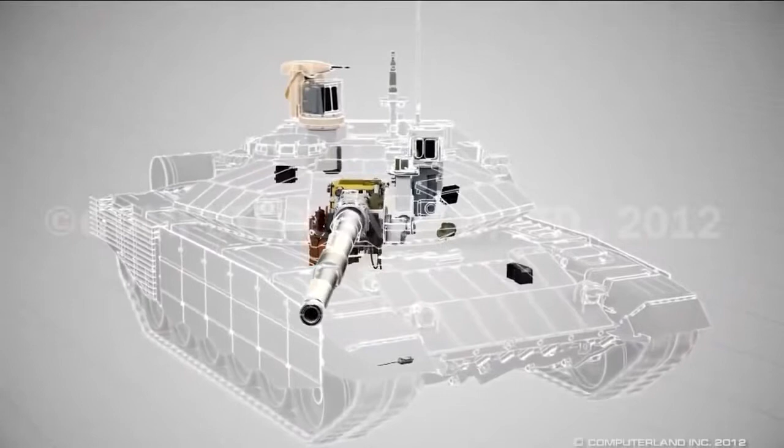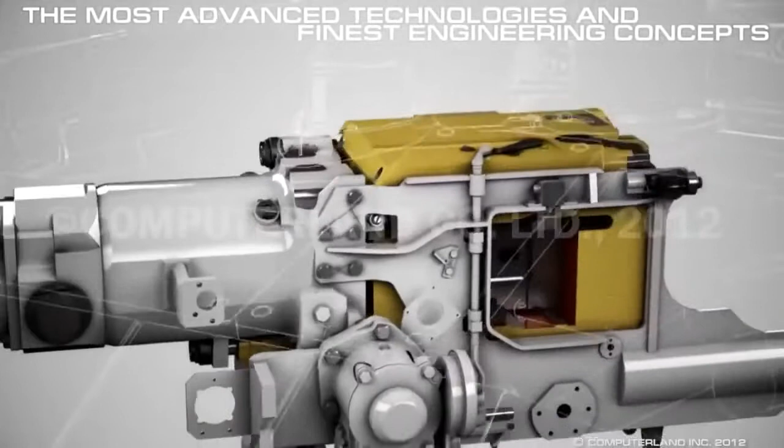2A46M5 gun. The most advanced technologies and finest engineering concepts, well grounded in years of experience in tank and artillery design and manufacturing, are applied in the making of the enhanced 125mm gun. The improvements have provided for higher precision and fire accuracy due to the new constructive solutions and technologies introduced at the production stage.

The gun has a high rate of effective fire range with conventional ammunition. For example, with the APDS projectile, the range is up to 2700 meters, which is the best result in the world. The tank is armed with the improved 2A46M5 gun.

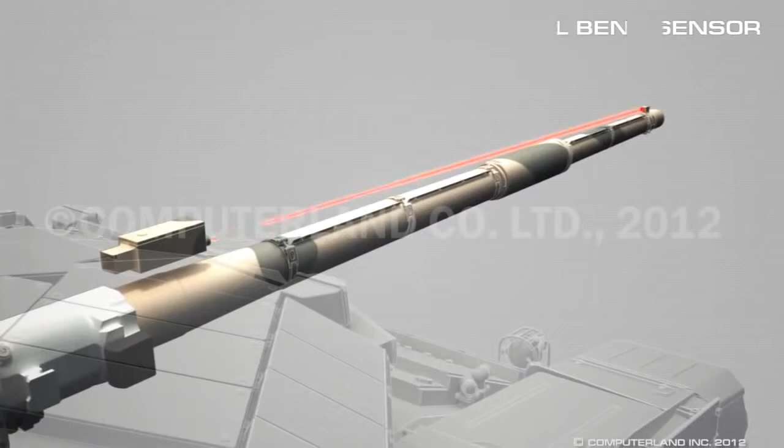In addition to the engineering solutions improving the gun itself, the 2A46M5 is equipped with a barrel bend sensor to increase fire accuracy. This device registers the bending of the barrel, resulting from environmental conditions and interior heat inside the barrel upon firing, and enters the correction data into the fire control system.

The constantly high rate of fire is up to 8 rounds per minute, which is ensured by the automatic loader. The rate of fire is sustained on the move under any conditions. In this respect, the tank is unsurpassed and has no rivals in the world. The automatic loader holds 22 out of the 40 rounds the tank carries.

The tank's ammunition includes 4 types of gun rounds, which guarantee destruction of all enemy targets and successful execution of a wide range of fire missions on the battlefield. HEAT shells are to destroy armored vehicles, brick and reinforced concrete structures, as well as manpower sheltered in field fortifications. APDS projectiles are designed to defeat modern tanks with combined armor protection.

The guided missile with a shaped charge warhead hits armored and heavily protected small-sized targets with high accuracy. In addition, it can be used to destroy low-flying helicopters. High-explosive fragmentation shells are essential in combat against manpower, artillery and field engineering facilities.

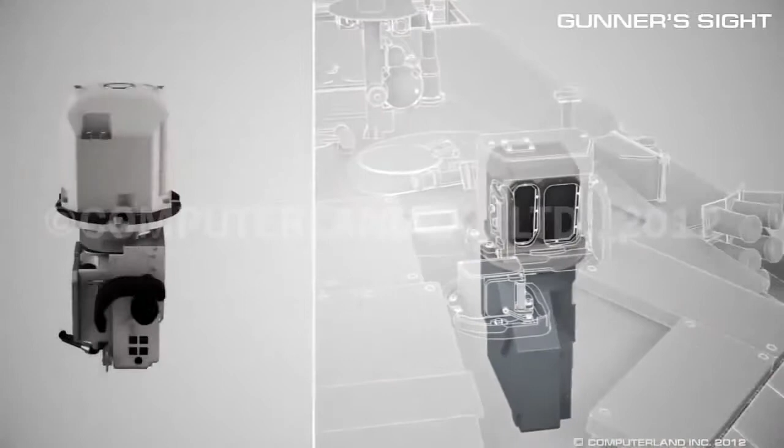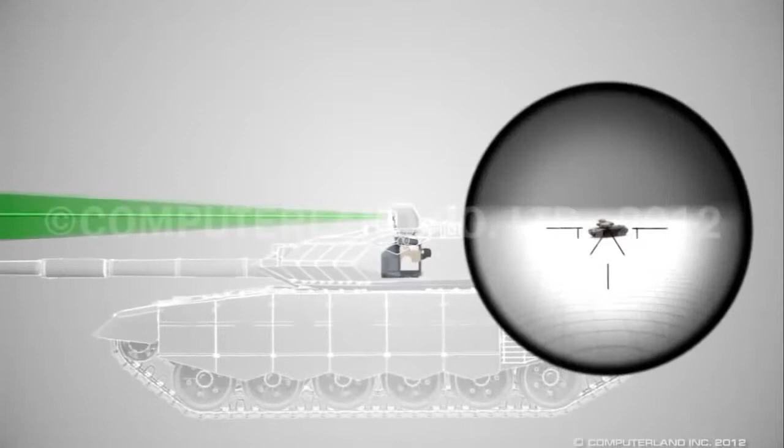The gunner's sight with 2-axis independent stabilization of field of view is multi-channel. It has a sighting and a thermal channel, a built-in laser rangefinder and a missile control laser channel. The sight enables the gunner to detect and accurately hit targets under any conditions. That is due to the improved optics and high-precision stabilization of the sight's field of view on both vertical and horizontal axes at 0.1 milliradians.

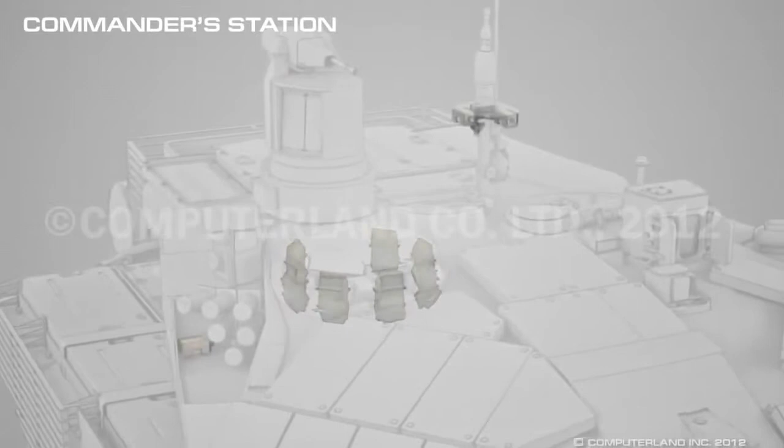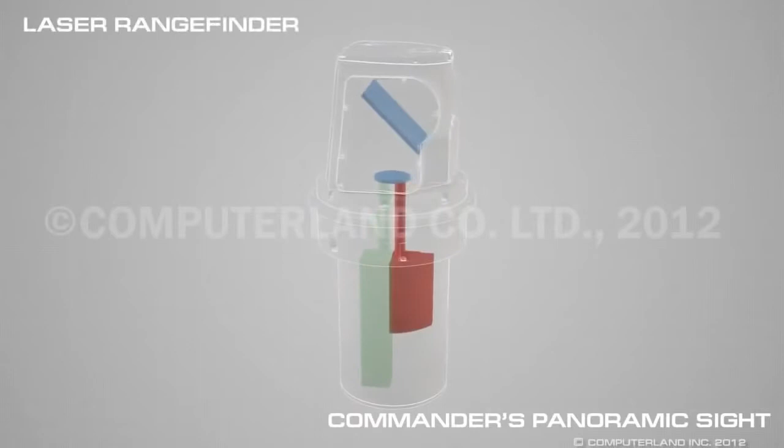Commander's station has been largely improved in terms of target detection, firing and combat management. For this purpose, a panoramic sight, 8 prismatic vision devices and the all-round video observation system are newly installed on the T-90S modernized tank. Commander's panoramic sight with the 2-axis independent stabilization of field of view has a thermal and a television channel and a built-in laser rangefinder. It provides 360-degree target detection and tracking.

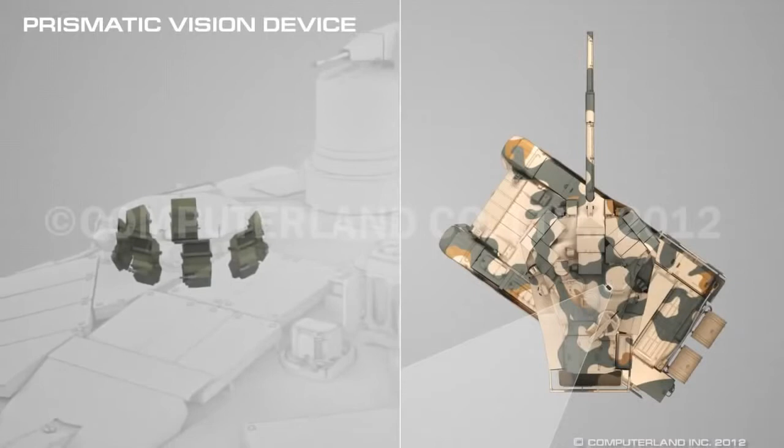External video observation system ensures the commander's all-round surveillance over the adjacent area. Its 4 television cameras can work in low light conditions. Commander's nearest visibility is simultaneously provided by the 8 prismatic vision devices located around the perimeter of the hatch. Each device has an indicator showing presence of the panorama field of view in the device's observation sector.

There is a mode of aligning the sighting line of the panoramic sight with either a chosen prismatic vision device around the commander's hatch or the field of view axis of one of the TV cameras. One can also automatically align the panoramic sighting line with the direction on the electronic map on the commander's multifunctional control panel. All those functions significantly increase the commander's visual and searching capabilities.

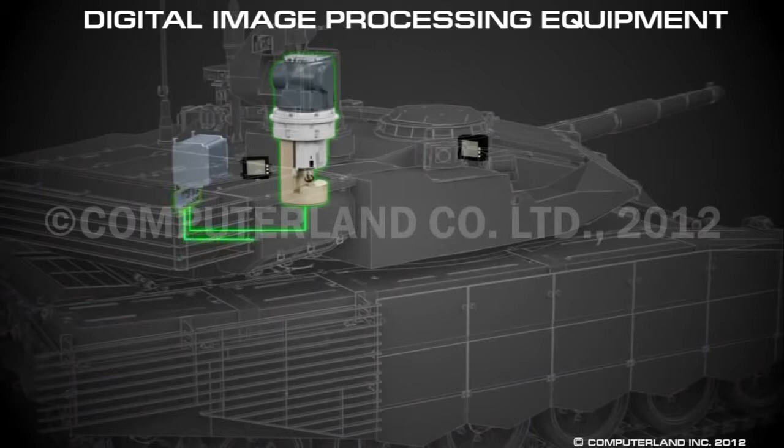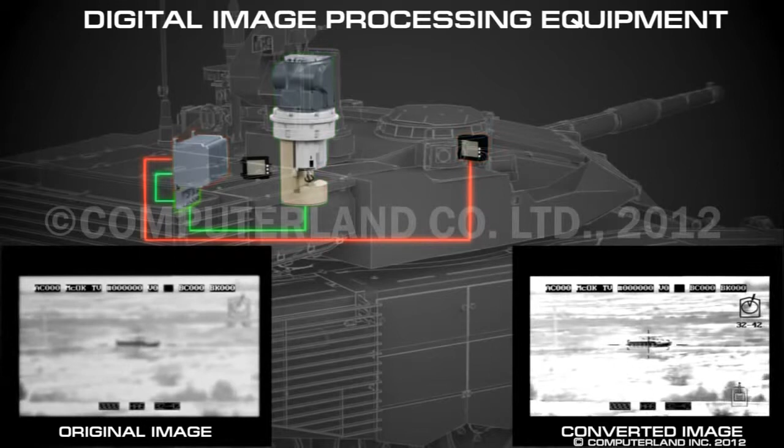Image quality of the commander's video viewing device is enhanced due to the system of digital image processing of the video signals from the thermal and television observation channels. Therefore, a T-90S commander can recognize targets at distances of up to 5,000 meters. In addition, the equipment performs the function of automatic target tracking, and targets may also be tracked independently by the commander and the gunner at the same time.

The T-90S modernized tank is equipped with a TV parallel sight shared by the gunner and the commander, who can thus conduct observation and firing when their respective sights are out of order.

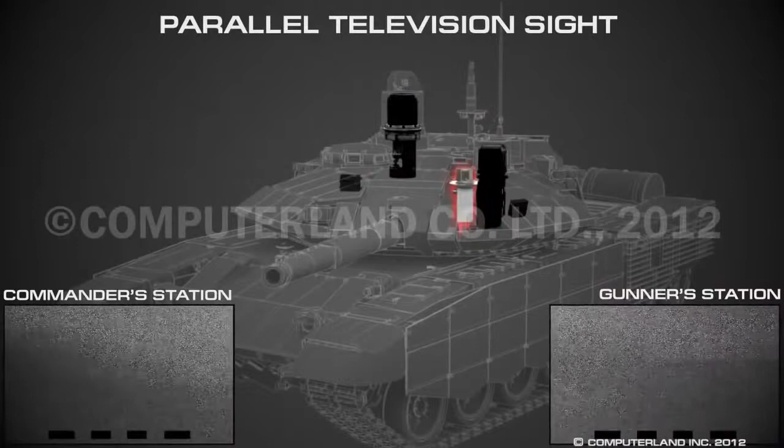The ballistic computer is there to provide automatic record of all data affecting the firing conditions right before the shooting. This eliminates errors in the input data and thus considerably increases the fire accuracy. Moreover, due to the flexibly reprogrammable circuit for calculation algorithms, one can enter the ballistic parameters for new types of ammunition.

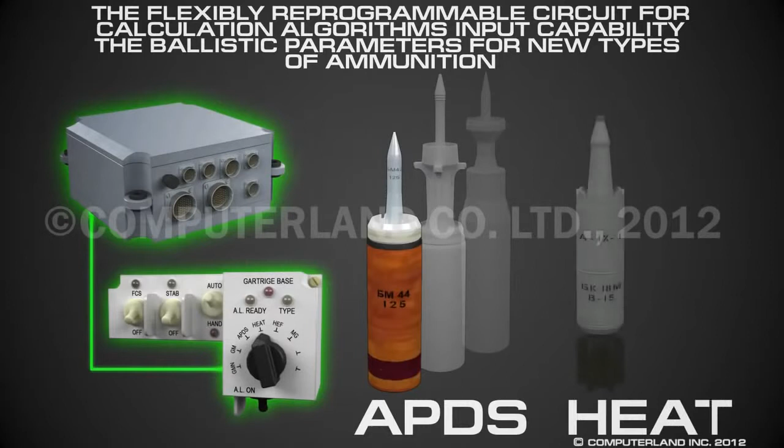A new weapon stabilizer is installed on the T-90S modernized tank. It is based on digital technologies. This provides high stabilization precision and increases the speed of horizontal swapping of weapons.

The maximum efficiency of the tank weapons in use is determined by perfect adjustment of the commanders' and gunners' searching options and by the opening of their respective independent channels of target detection, tracking and destruction. Those options realize the highly effective gunner-hunter mode of the fire control system, wherein the commander conducts observation and assessment of the tactical situation regardless of time of day, detects and recognizes targets, whereupon he, so to speak, passes the targets over to the gunner for extermination and goes on with the target search.

Implementation of new engineering solutions in the armament and fire control system of the tank brings about the following improvements. The target detection period is reduced. The preparation time for firing the first round is cut down to 10 seconds, which is the best rate in the world. The range of target detection is increased to up to 5,000 meters in daylight and at least 4,000 meters at night. The effective ammunition firing range has risen. The probability for the guided missile to hit the target is rated closely to 100%.

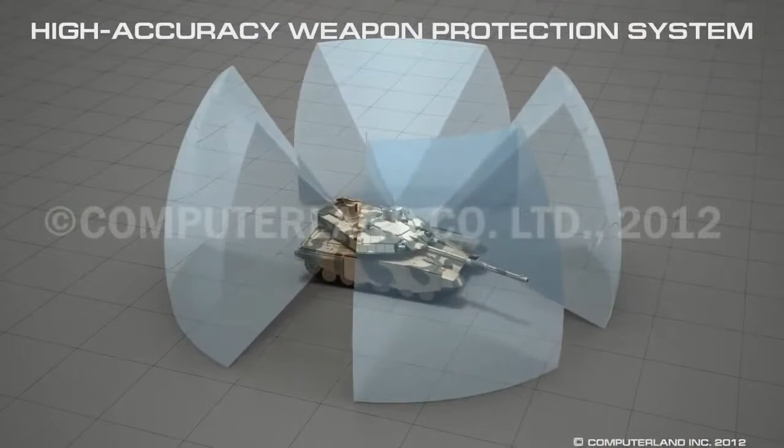The T-90S modernized tank design retains the traditional Russian ideology of complex protection. In spite of the slight increase in the tank's weight, the vehicle has low silhouette and small dimensions. In combination with camouflage painting corresponding to the combat terrain and the heat shields around the power pack compartment, this makes the tank poorly noticeable on battlefield in both infrared and optical range and reduces the chances for its being hit. Once the tank is detected, its automatic screening system prevents the vehicle from being hit by anti-tank missiles.

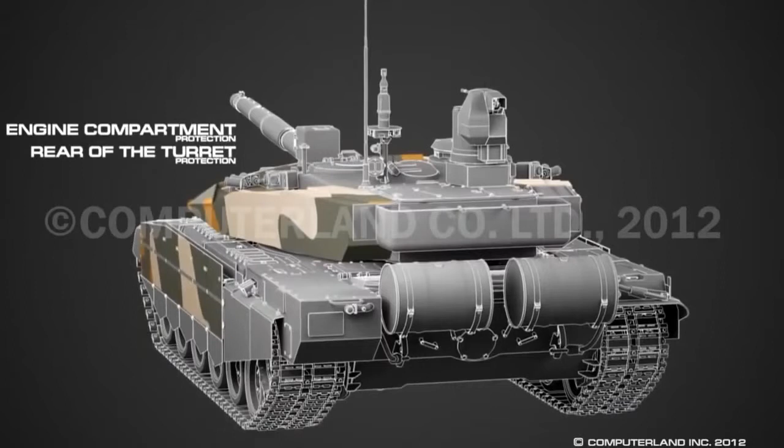Almost half a century of experience in creating dynamic protection for military vehicles and our world leadership in the design and implementation of such technologies have made it possible for us to develop the new integrated protection system for the T-90S modernized tank, which is resistant to all anti-tank ammunition types and which is based upon the new generation modular principle. Additional security is provided by installation of louver panels to protect the power pack compartment and turret rear from anti-tank grenades.

With the presently achieved increase in operation safety, when bullets or fragments penetrate the dynamic protection elements, they do not detonate. Dynamic protection guarantees effective resistance to tandem warheads, secures the tank from the EFP ammunition types, and reduces the impact of shaped charges and armor-piercing projectiles to 80% and 50% respectively. An important advantage of the modular structure of the dynamic protection system is that it considerably simplifies repair and replacement of parts. The protection system is easily operated and maintainable even in combat conditions.

Stowage of the tank's ammunition allowance has been optimized. To reduce chances of explosion, the ammunition in the crew compartment within the possible reach of the anti-tank means is detached into a separate proof section. Security is maintained by the conic shape of the turret, dynamic protection system and the ballistic container. Hence the high survivability of the crew upon detonation in the isolated stowage section. The ammunition placed in the automatic loader and in the additional stowage section for non-automated reload is locally protected by extra shields.

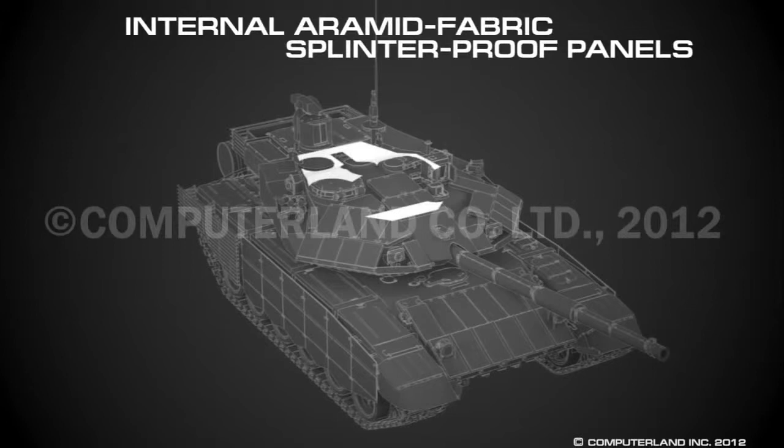Complex protection also includes interior anti-fragmentation panels made of aramid fabric to secure the crew and equipment from the secondary flux of tank fragments. For the outside protection of the sight windows, armored covers are installed, which are remote controlled from the crew compartment. To sum it up, a comprehensive set of safety-inducing measures has ensured the two vital features of the tank's protection systems, namely the vehicle's unsurpassed durability on battlefield and the high survivability of the crew under intensive anti-tank activities of the enemy.

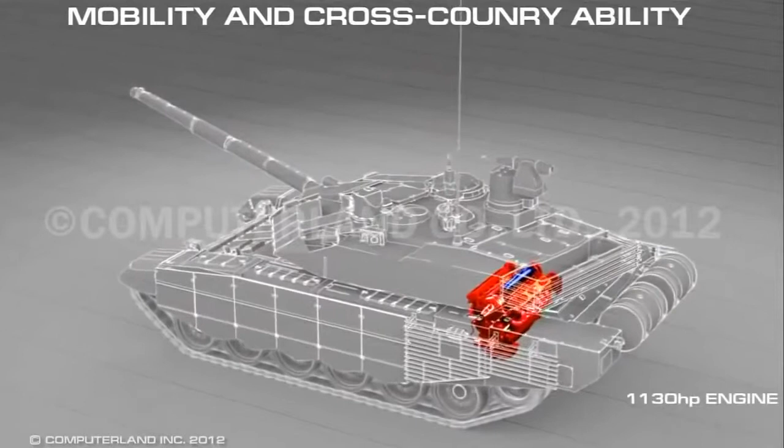The T-90S modernized tank demonstrates high mobility and control, even under extreme heat and dust conditions. This is accomplished by the installation of the high-efficiency 1130 horsepower engine and the steering control system with automatic gear shifter and steering wheel control linkage. As a result, the tank is very fast and maneuverable. Its excellent off-road capabilities are due to its low weight, which allows the modernized T-90S to confidently take any routes on and off roads and bridges in various weather conditions. Furthermore, its fine chassis accounts for the wonderful smoothness on the move.

The tank is equipped with a broadband 2-channel USW radio set, combined navigation system and the equipment to integrate the tank into the division battle management system. The interaction control system provides the following. It receives signals by GLONASS and Navstar satellite navigation systems. It significantly accelerates the unit commander's decision-making in combat situation. It considerably reduces the amount of time required for tactical situation assessment and the crew's effective response.

In conclusion, due to the perfect combination of the vehicle's fighting and engineering strengths, the crew can successfully conduct military operations in various climatic and weather conditions at any time of day and achieve their goals in the complicated realities of modern land combat.